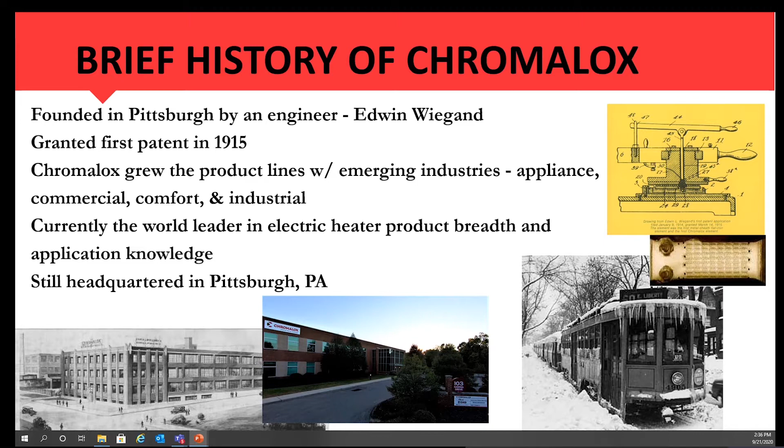As most of you know, Chromalox has been around for over 100 years, which is quite an accomplishment when you stop and think about it. Companies sometimes don't last that long, with our first patent in 1915, and we're still the leader in electric heater products, and still have a big breadth of product and application knowledge. And of course, we're still headquartered in Pittsburgh. The building looks a little different than it did back in 1915, but we're still in the Pittsburgh area.

All of our heat tracing manufacturing is out of La Vergne, Tennessee, in the 150,000 square foot warehouse. That's where we manufacture all of our cables, panels, our controls. Our application engineering is out of there, design engineering. Of course, we warehouse all of the equipment out of there, and our site services run out of La Vergne, Tennessee, which is about 15, 20 miles south of Nashville.

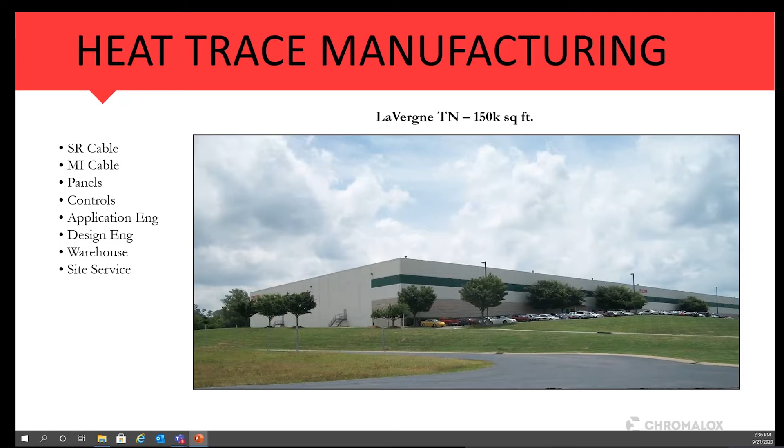Like I said, we still have a broad breadth of heat tracing products, our cables, engineering services, components. We can do tubing bundle enclosures and tubing bundle products, as well as the full breadth of our heat trace controllers, from our single point controllers to our freeze protection panels, our digital thermostat controllers, and our ITLS and ITAS larger panels. And all of those will communicate with our IntelliTrace supervisory software.

And we do all of our design out of ChromaTrace, which we saw last week with Charlie's presentation, where we get all of our design for heat tracing. And that's the breadth of our designs and where all of that comes from.

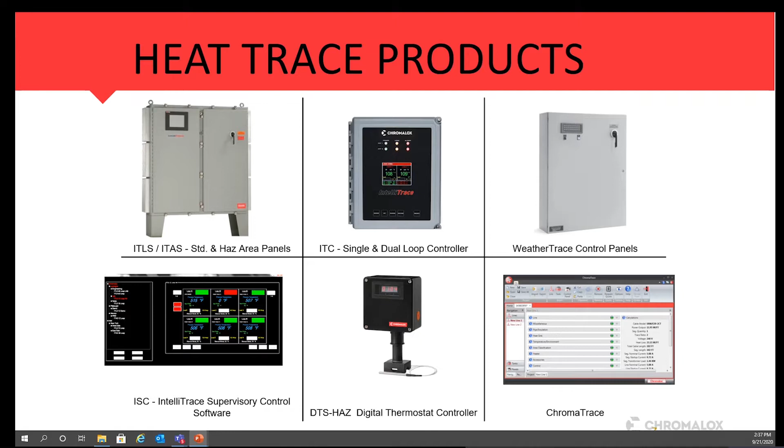Let's talk a little bit about heat tracing. In my years of heat tracing, I broke heat tracing into three main categories: freeze protection, process maintain, and commercial applications. Freeze protection, in my mind, is the prevention of water from freezing in pipes and vessels. That's typically controlled by an ambient sensing thermostat, and it's a group controlled application. I'm sure many of you are familiar with freeze protection.

In the 20 years or so that I was in the business down here in the South, we didn't do a lot of freeze protection because we're so far south, it's not necessary. They kind of hedge their bet against pipes freezing, but we do get a lot of that in a lot of your territories. Process maintain is the maintenance of a specific temperature based upon process chemical data. That's typically controlled by a line sensing RTD, and is typically a single controlled circuit application.

Now, you will see some people that will still try to do this with a group application. It can be done. It's not recommended because you have different heat losses for different pipes, and some pipes may end up getting hotter than others over time when you're using an ambient sensing control. But there are other ways of doing that with ambient sensing also. And the last application is commercial, which is our snow melting, gutter de-icing, hot water maintenance. Those are the three categories that heat tracing falls into.

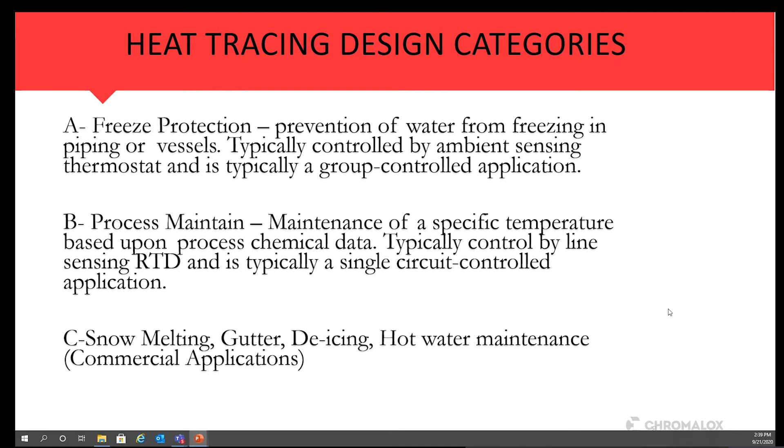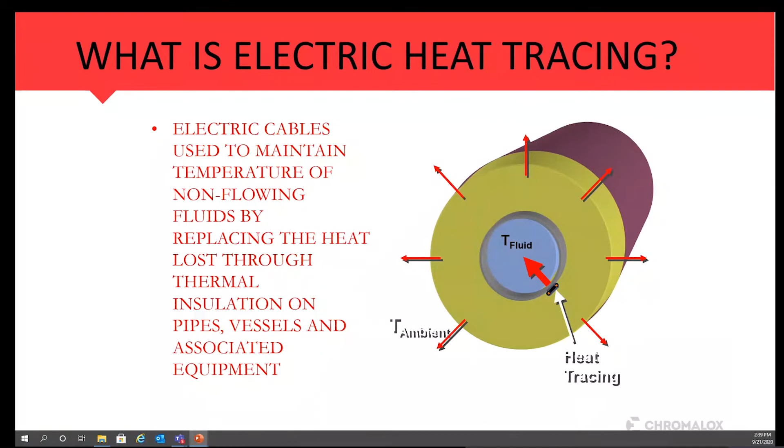So what is electric heat tracing exactly? Electric heat tracing is the use of cables to maintain temperatures of non-flowing fluids by replacing the heat lost through the thermal insulation of pipes and vessels. Sorry, that screen keeps jumping on me, but basically if we do not heat trace a pipe and we just insulate it, then over time there's going to be some heat loss, and the temperature is going to settle at some level that's less than what you desire.

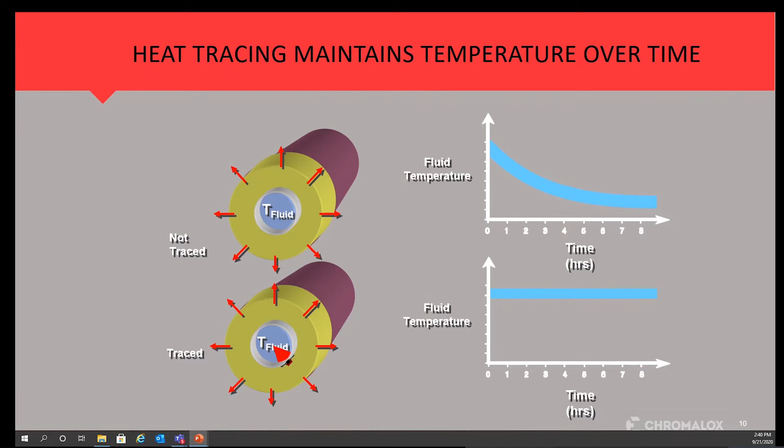So in order to maintain that temperature, we put back that heat loss with some type of heat tracing cable. Could be single pass, could be two passes, could be self-reg, MI, whatever it may be. And so over time, now we can maintain that specific temperature.

And of course, that comes out of our basic thermodynamics heat loss equation, which has been around for years, which is heat loss is the area times temperature difference divided by the thermal resistance. In this case, it's the pipe size and the difference between the fluid temperature and ambient temperature divided by the insulation types and thickness. And those calculations, as most of you know, come out of our Chromatrace software. So it makes it easy for you to get those heat loss calculations.

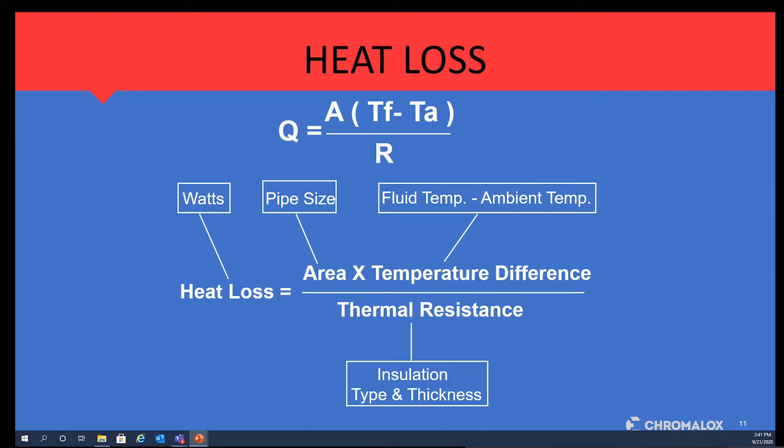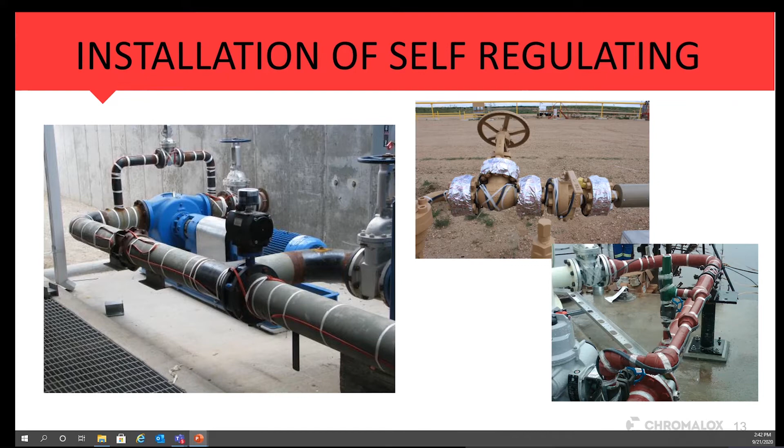So if we look at a typical heat tracing installation without insulation on it, you can see that we have valves wrapped accordingly. We've got extra cable for heat sinks where we have flanges. We have cable that goes around bypasses. So this is what it looks like when it's uninsulated. And so what we want to do is make sure that we have the appropriate cable in the appropriate places. Now, when it's insulated, we don't necessarily know that it's there, but even if someone's doing some work and going back and doing some repairs, we want to make sure that they're putting that stuff back on properly.

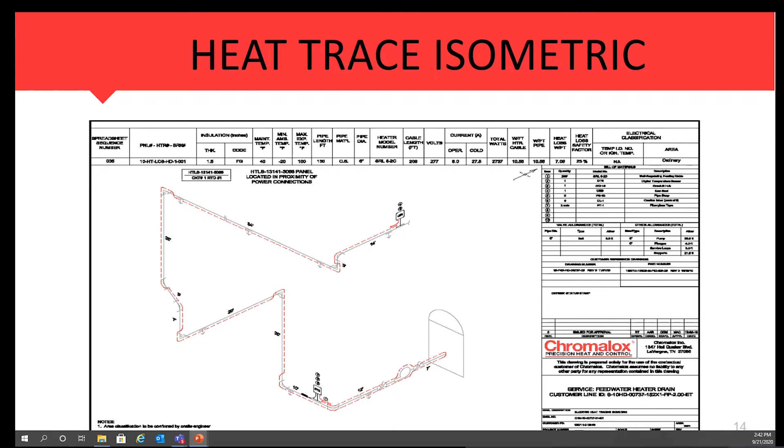When we're doing troubleshooting, I like to start with the heat tracing isometric if the client has heat tracing isometrics. Why? Because number one, it gives us all the data we need about the circuit, right? How much current are we drawing? What's the length of the cable? Where does the circuit start and stop? Okay, if I don't have a heat trace isometric and I'm trying to troubleshoot the circuit, especially if the end seals are underneath the insulation, then I have no idea where the circuit starts and stops. So I strongly advise you to make sure that even on the smallest of projects you get a heat tracing isometric design done, because if you want to go back and troubleshoot, it makes it a lot easier for us to figure out what's going on and where the circuit starts and stops.

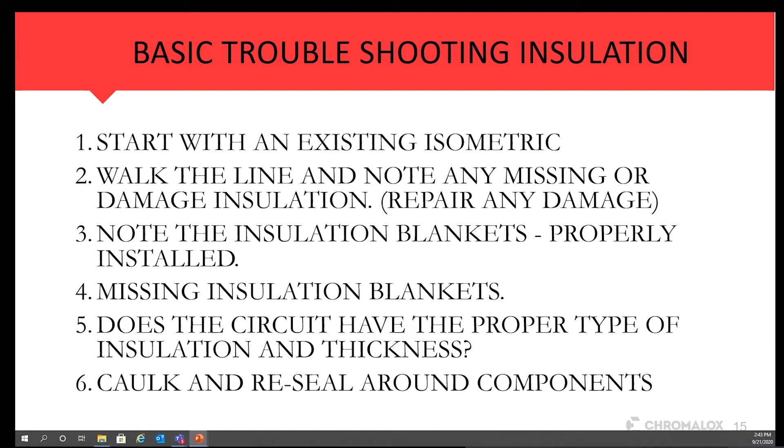So when we're troubleshooting insulation, like I said, we always want to start with an isometric. We want to walk down the line and note any missing or damaged insulation, and repair any of those damages if it is there. We want to note, are there insulation blankets? Are they properly installed? Are there missing insulation blankets? Does the circuit have the proper type and thickness of insulation? We can get that information also from the heat trace isometric if we have it. We know the type and thickness if we just go back to that isometric and look at it. And then caulk and reseal around components.

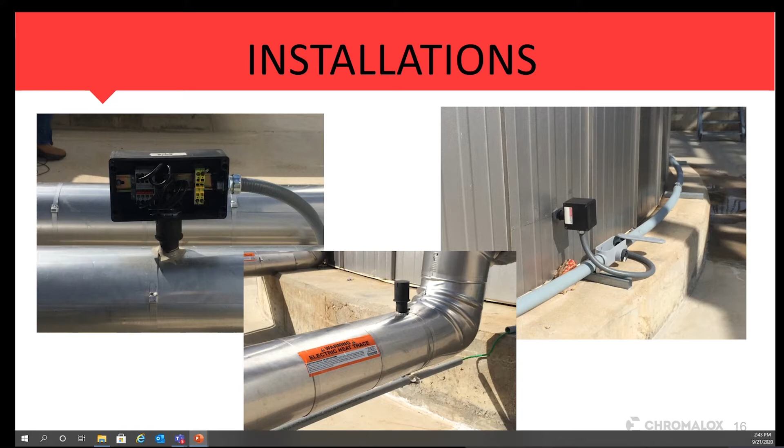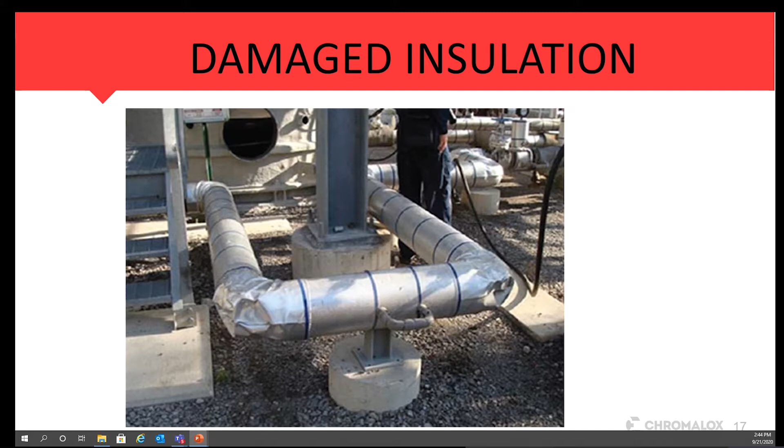And the other thing that's interesting about this photo is that, to me, that looks like a steam hose that the gentleman has, that he's taking steam and trying to shoot it up underneath the insulation, and he's trying to steam out a line that may be frozen. That may or may not be the case, but that sure is what it looks like. So again, here we see this insulation is busted up pretty bad. And then in the picture you see over here, there's a blanket that's missing.

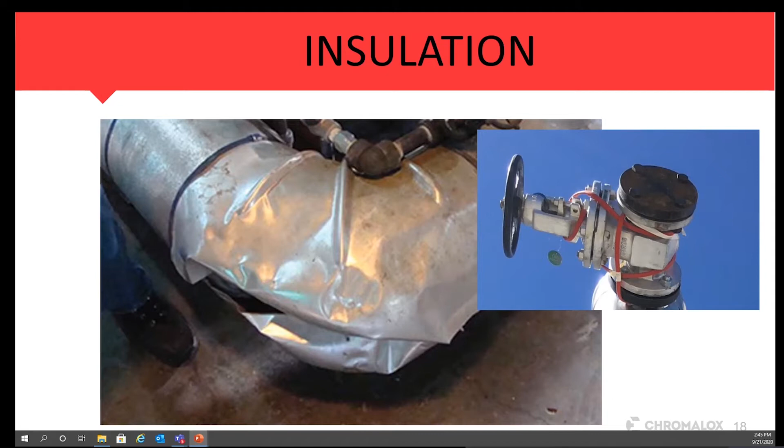And on a lot of jobs that I've gone and looked at, most of the time when they say they can't maintain something, I've walked out to a job and the insulation blankets are laying over there, or they've done some work to some valves and they've left the blankets off, or they haven't gone back and insulated, as in the case of what you see here. Someone just wrapped some piping and decided, oh, we'll just use it like that. We don't need the insulation, but we do need the insulation.

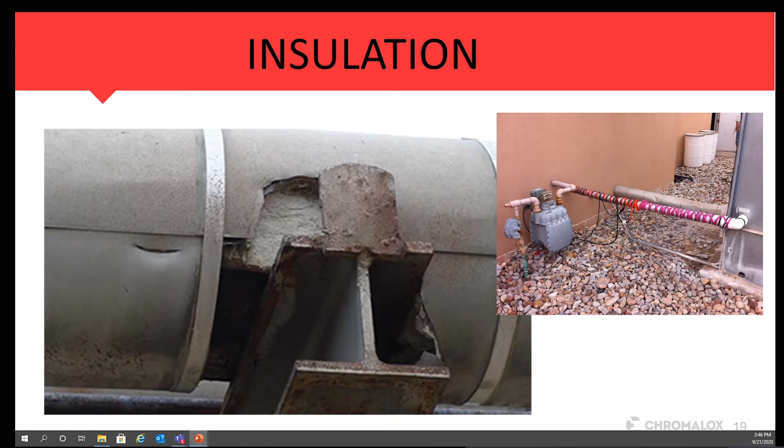I kind of liken that to someone telling me, well, why do I need to insulate it? And I always say, okay, in the middle of the winter, if it's 20 degrees outside and you heat your house up, if you take the roof off, do you think you're going to be able to keep it at 70, 75 degrees? No, you're not, because you're going to lose all that heat, and you're going to lose a good bit of your insulation also. So keep in mind, insulation is a big part of what we're trying to look at whenever we're troubleshooting some heat tracing.

Now we're looking at the heat tracing cables and components themselves. Same thing, we're going to start with an isometric, right? In this case, we can go see if the circuit is drawing the current it's supposed to be drawing. If you have lighted end seals, you can go see if the lighted end seals are actually lit up. Do I have power and continuity all the way through my circuit? Sometimes the current itself comes on an electronic controller, so you can compare that with the electronic controller. If you don't have that, then you're going to have to get some kind of electric meter where you can figure out how much current the system's actually drawing.

Is the system coming up to the design temperature, the maintenance temperature that it's set for? Is the RTD mounted and wired correctly? I see this a lot too. I see pipes that have been repaired, and then an RTD is hanging out in the open, or it's real close to some blanket that's missing, or some insulation that's been repaired. And so now we're getting the wrong temperature sent back to the controller, and maybe the heat tracing's staying on all the time, or it's not operating properly. So RTD mounting is a big issue that you'll see.

Are the controls operating properly? One of the things you can do is force the heat tracing on. Some panels have the ability to do that. If you have a freeze protection panel, you can switch that to hand mode. Also keep in mind that some heat trace controllers have an auto cycle program. So if the client wants to auto cycle the program during the summertime and understand that the system's working properly, that's another thing to help them troubleshoot some heat tracing.

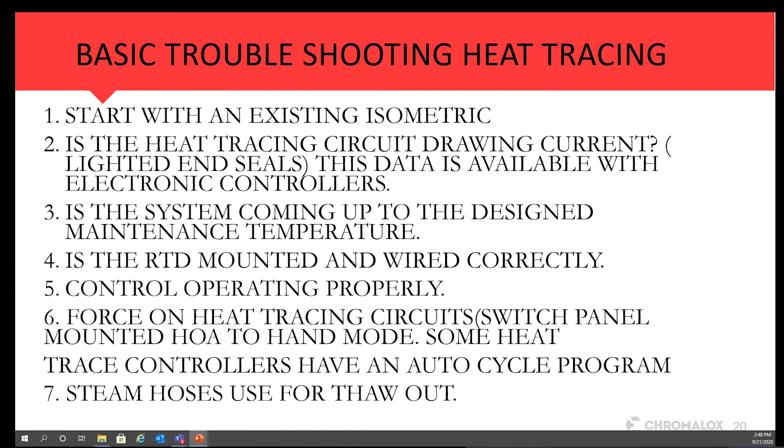We look at basic electrical, and this is what we talk about with power distribution. Again, we want to measure the heat tracing cable and make sure it megs properly. We want to check for the proper operating current levels. Ground faults, we're going to look for ground faults. Is there water in the power boxes? Or is there a cut or a screw or a nick in the heat tracing cable?

One of the theories I've always used about repairing things, even my own things, is I go back and look at what's the last thing I did. If something's broken or not functioning properly, it may be the last section of piping that we worked on. We replaced a valve, we changed some piping here, we redid some insulation. So that's a good place to start.

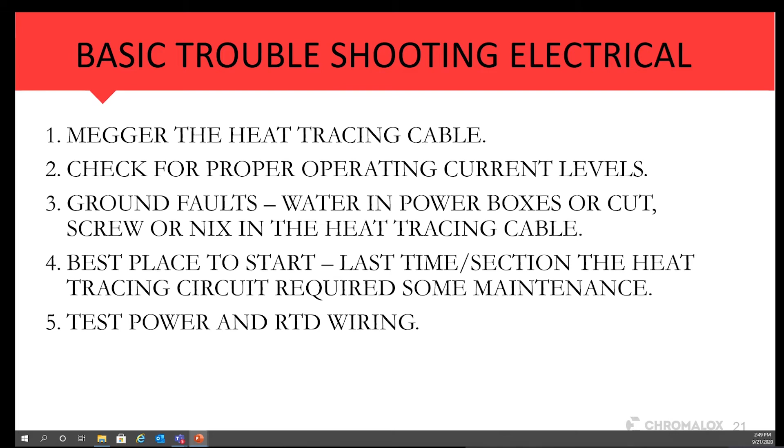And then also you can test the power and RTD wiring. I've seen this in numerous applications where you walk up and the power box is broken. Someone hit the power box, it's broken off of the stand. The wire might be damaged, or the cable's been pulled out of the terminations inside that power box. Or again, we'll see an RTD, an ambient sensing RTD, that's mounted in the shade, right? So we want to look at those kinds of issues and make sure they're mounted properly, and if it's in the shade, it doesn't need to be in the shade, it needs to be in the sun.

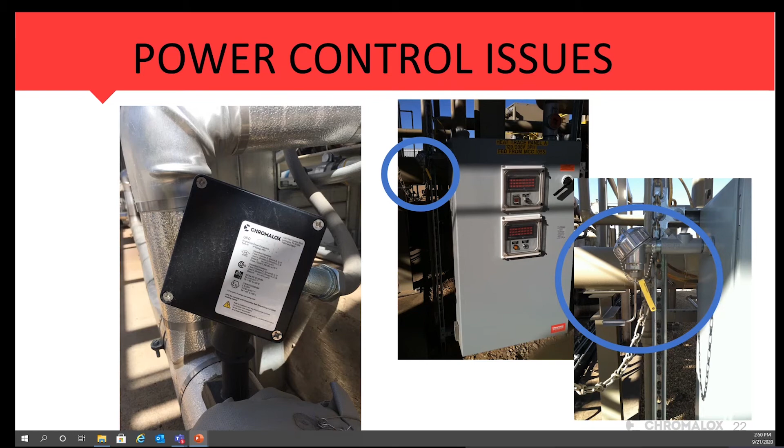And then we talked about process considerations. So a lot of times we run into different people at facilities that don't fully understand what their process is. And so, do I have a full understanding of how the process operates? Because one of the basics of heat tracing is that I can only maintain these temperatures in non-flowing conditions. And so, do I understand when the product is flowing and when is it not flowing? Some people get confused by that.

They say, well, my heat tracing is not coming up to temperature on this line, but it's working over here. And so a lot of times I'll ask, well, is the process working at this point in time? And they'll say, yeah, it's flowing. Well, we're not going to be able to get to the temperature when we're in a flowing condition like that.

And also, is the system attempting to maintain heat from vapors or gases, or trying to minimize condensation? So when we get into those applications, because we have a lot of gases or vapors that may be moving, we're trying to take care of condensation, typically on the surface of the vessels. And so even though we have some extreme temperatures on there, the system may not be coming up to temperature because there's a lot of gases or vapors flowing through that vessel. So keep that in mind also when you talk about process considerations.

So it's important to understand how the process works. Go talk to the process engineers to get an understanding of what they have going on, and then we might be able to solve some issues there.

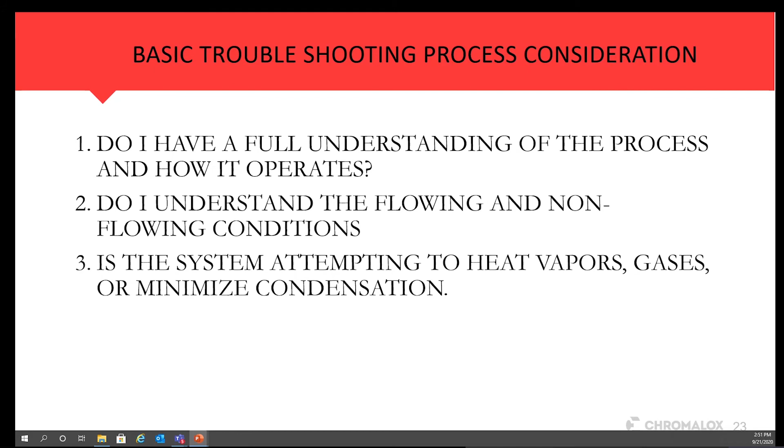Everyone pretty much knows what an installation looks like. I showed you some pictures, but this is our quick install guide. As I said, it's always great to have an ISO because we know where the power box starts, where it stops, and where our end seals are. If you don't have those, then you're relying on Bubba. And if Bubba leaves the plant, someone says, well, where does that circuit start and stop? Well, go ask Bubba. He knows where that's at.

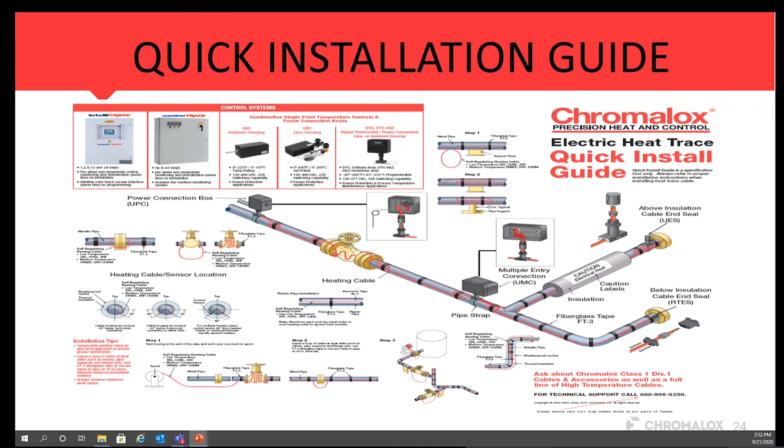But if Bubba leaves and we don't have this information, then the next person down the road has to try to figure this stuff out. So it's important, as I said, to try to get those heat trace isometrics and have a whole library of those that you can pull from, because it's going to make life a lot easier for you.

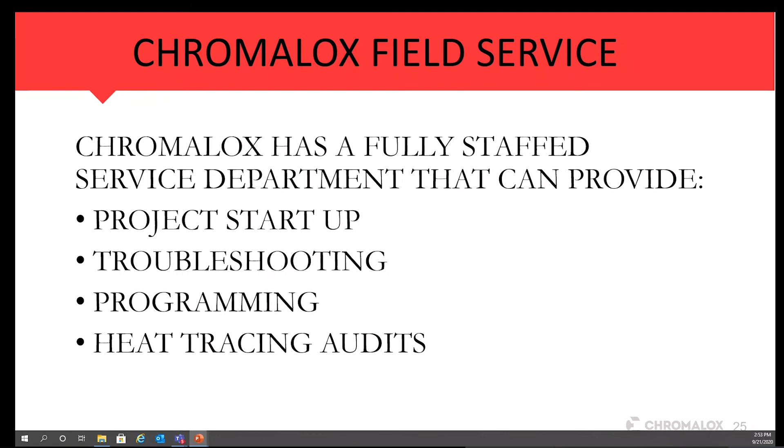And then the last thing is heat tracing design information, right? What do we need up front as a company when we're looking to do a design for a heat tracing system? So we need specifications for the heat tracing, electrical, and insulation. We talked about insulation. A lot of times people forget about that insulation, but it's a key component of a heat tracing system. So we want to know what type of insulation, what thicknesses we can get by with.

P&IDs, that goes back to understanding flow and non-flow conditions. That's how we're going to circuit some of our process maintain applications based upon those P&IDs. Piping isometrics, area classifications, what's my minimum ambient, maximum ambient, the maximum cable exposure. That goes back again to people steaming out lines and damaging the conductive core of our self-regulating cable. So we want to make sure we understand that.

What's our maintain temperature? We want to get those insulation types and thicknesses. And am I doing a freeze protection or a process maintain, right? Need to understand that. And then degradation temperatures of specific products. So when we are doing some process maintain applications, there are certain chemicals in certain products that have an upper temperature limit where we start changing the color or the composition of that product if we put too much heat into it.

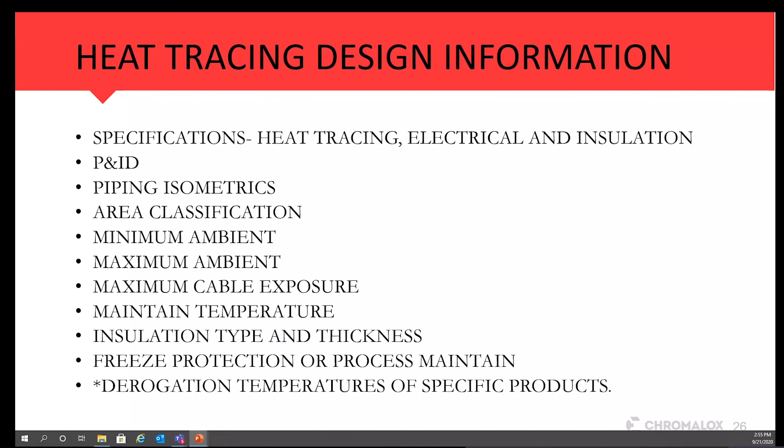Other than that, I think that pretty much covers it. Like I said, I think it's important that you understand those 4 different categories and have an awareness of them. It'll help you figure out some simple things. We're not diving into a lot of technical details on how you go about megging a cable or metering. We'll leave that to the electrician, but it gives you an overview of what you really want to look for when you start to have issues with heat tracing.